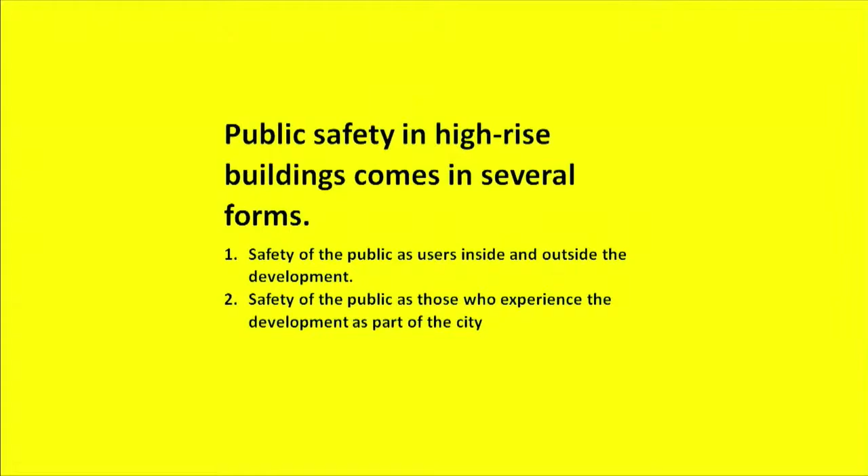That's essentially the main component of public safety that an architect or an engineer of a project would have to be responsible for. But at the same time, we have also the safety of the public as those who experience the development as part of a city.

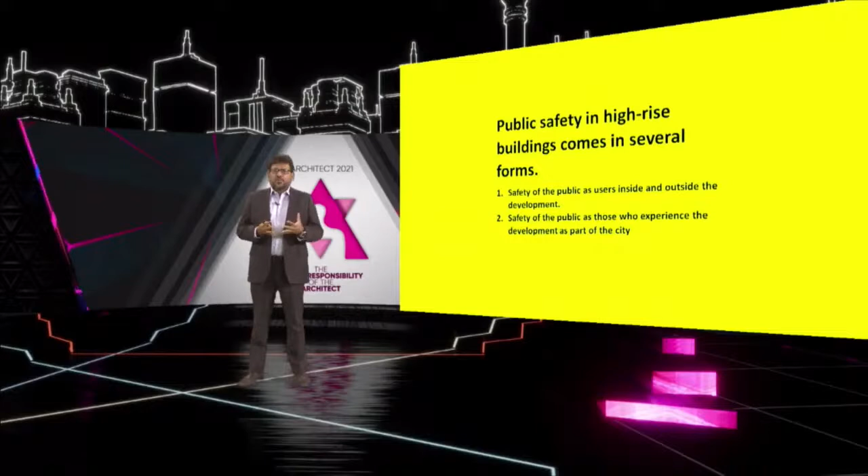Going into the safety of public as users, this comes in many forms. It comes as structural safety of a building, fire safety, passive and active forms, vertical transportation and safety from falls, safety of MEP systems, safety during construction, and these are essentially very well documented, coded, regulated, legalized. Architects, engineers, all the construction professionals are legally bound to follow these codes and regulations.

At the same time, we also have the safety of the public as those who experience a development, a building or a collection of buildings, a project, as part of a city.

We talk about responsibility to the larger built environment, effects of the microclimate, things like urban heat island, wind, sunlight patterns, ventilation, how those things get affected by the developments, high-rise buildings especially, then economic well-being of the citizenry, and how high-rise buildings or dense built architecture can affect these things within a city development.

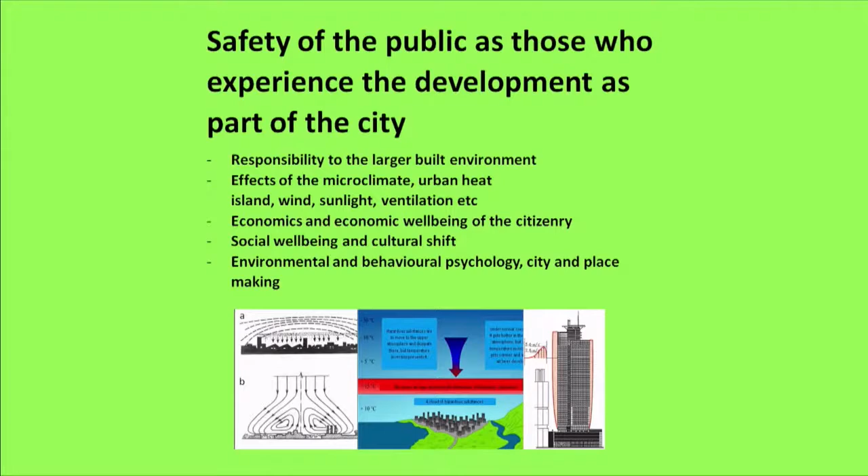We also talk about social well-being of a city or of its city dwellers, and the cultural shift that large mega developments would bring to a city or a country.

We also talk about environmental behavior, psychology of the citizenry, about placemaking, about city being a space for the public as well as for the buildings or the owners or the occupants of those buildings.

So safety of the public within the city becomes essentially a part of the responsibility of the architect who designs this city, mainly in the form of high-rise buildings and high-dense developments.

So high-rise buildings often are very prominent, celebrated static citizens of a city. Its owners, designers, constructors, governments, regulators, sometimes even the city itself celebrates these high-rise buildings as very important static citizens within the city.

So from banknotes to stamps to our social media to branding of a city to everything, the high-rise buildings always stand out.

With the celebrity status that we see high-rise buildings taking on within a city space, there is also a larger than life personality for them. Just like we expect from any celebrity in sports, drama, theater or movies, a city's larger than life static citizens, the high-rise buildings, also have this huge personality, and they become essentially imposing urban citizens.

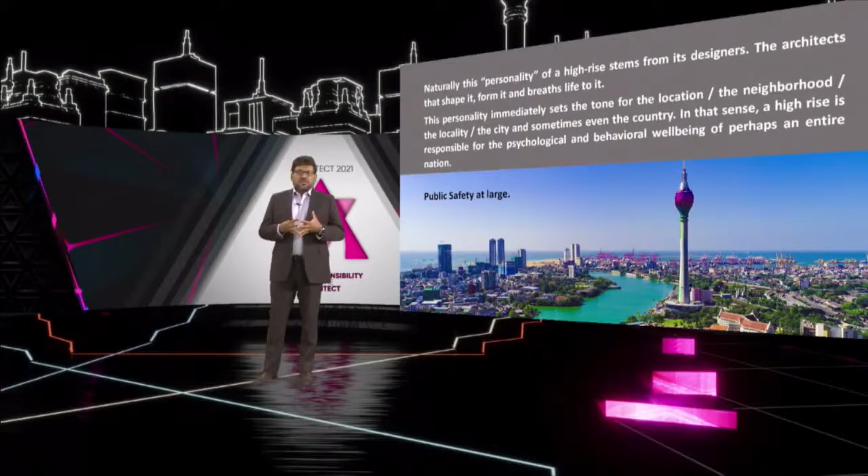So essentially, because of these key components, the design of a high-rise building could affect not just the safety or the well-being of the people who actually use it, but it also essentially relates to the psychological well-being or the overall health of a city as a whole.

This larger than life, intangible, qualitative form of public safety is not very well documented. We know there are codes for fire regulations, codes for density of a building, or codes for structural safety, but not necessarily about how a building relates itself or how it communicates its presence to the larger city.

In certain instances, urban design regulations or development control guidelines could address this to an extent, but by and large, especially in Sri Lanka, this responsibility lies with the architect, and the public trusts the architect to make sure these buildings or his creations have design features that will ensure the safety and well-being of the public.

So this is where making the right custard for your jelly comes in. As architects, we are very good at making jelly. Jelly can be really tasty, but it's the custard that pours around it, all around it, that will essentially make it delicious.

A city can't just be a collection of buildings, as we all know. The spaces around the buildings and how the buildings relate to the public spaces becomes absolutely important, just like the custard is important to enjoying a good bowl of jelly.

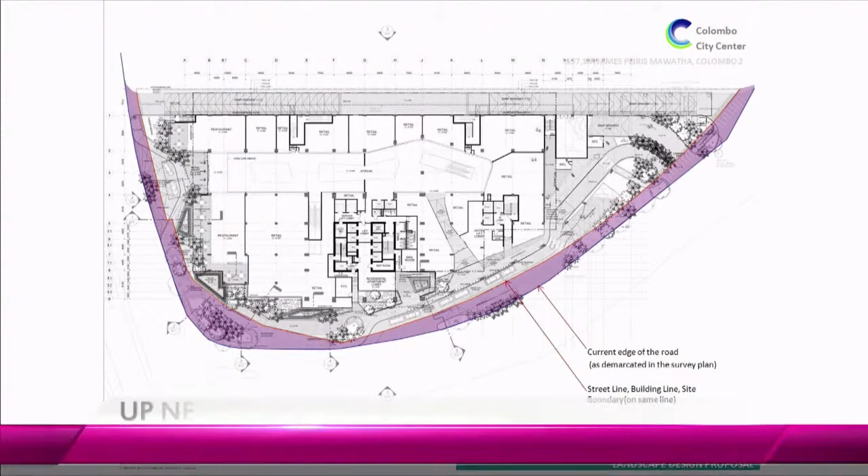Right from the outset of the design in 2013, us together with our international collaborators felt that the way this 48-story high-rise building connects to the public space is something we need to consider in the design. Essentially, this meant going beyond our developmental boundaries to see how we can merge the city's public space into the so-called private spaces of the building, ensuring the city responds positively to this 48-story, almost 1.2 million square foot development while recognizing its private boundaries.

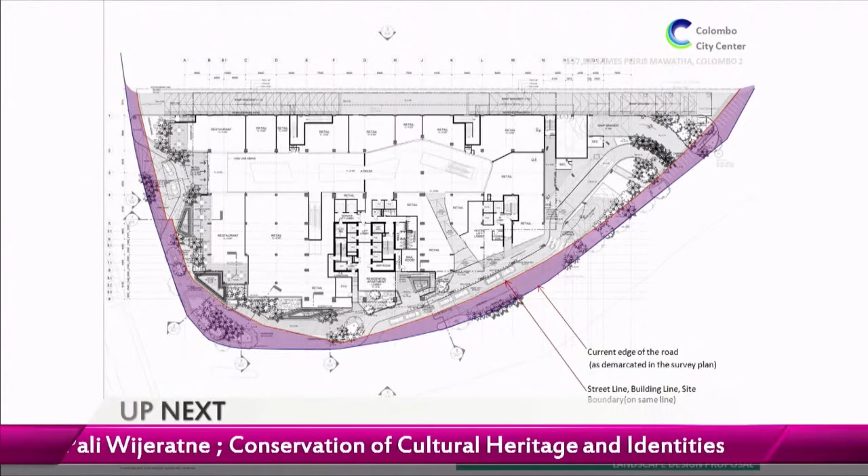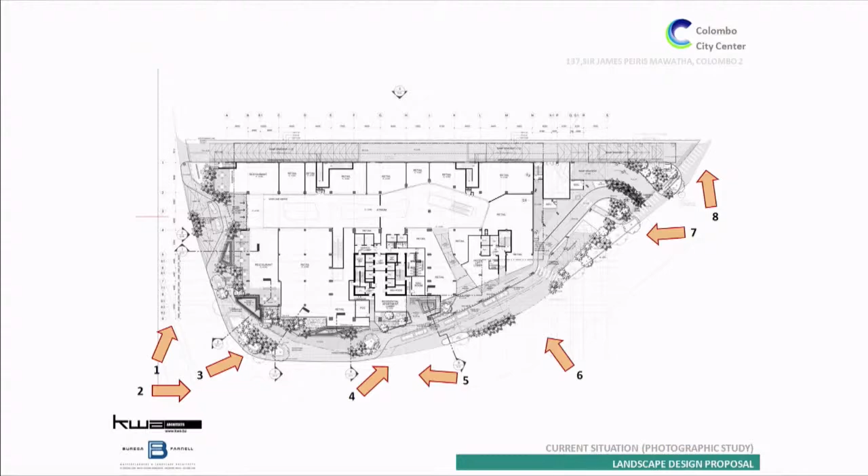So we looked at the street space down Muttiah Road as well as James Peiris Mawatha, which are the two main roads that the development is facing, and tried to understand what the existing scenario is and how this relationship from the building to the public space can be enhanced.

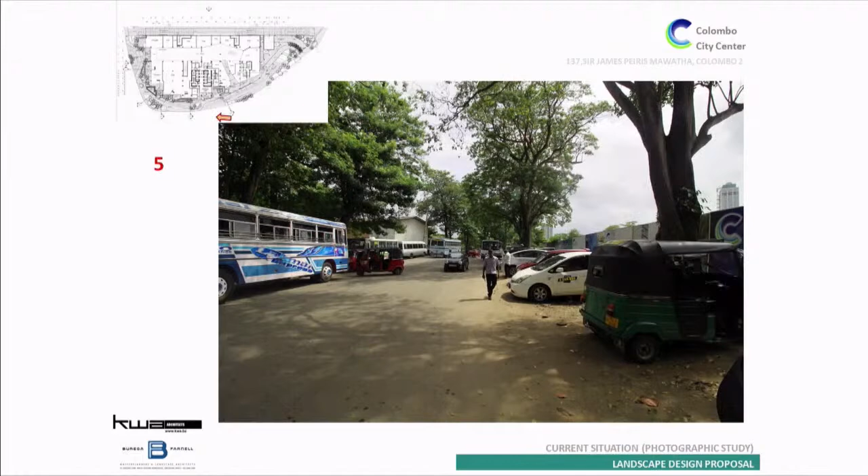So a few pictures of the site just as the land was acquired. Essentially, there was no public promenade as such, there were no public walkways. It's basically roadside parking, taken over for roadside parking. Absolutely no pavement present. People are walking down the tarmac to get from one place to the other. And there's a lot of stray garbage and haphazard vehicle parking happening down there.

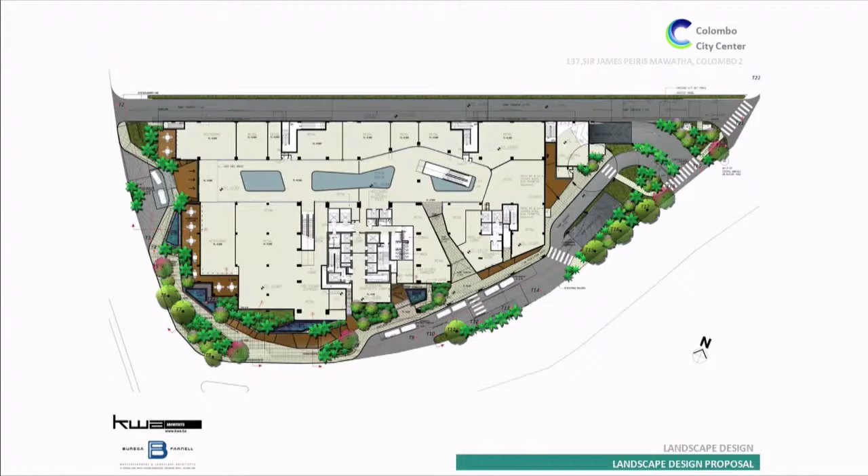So the CCC design attempted to ensure that the public entrances into the building were merged into the public space outside. It was seen as another small micro public garden kind of walkway, so that the pedestrian walkway can meander through bits of garden spaces, bits of street furniture, water features, and essentially almost subliminally welcome you into the public spaces.

Together with the international landscape designers, the entire streetscape was designed. Then it was presented to the Urban Development Authority as well as Colombo Municipal Council, who legally own the pavement spaces or public spaces along the roads in Colombo, and the presentation explained how this 48-story high-rise building was trying to merge into the public space.

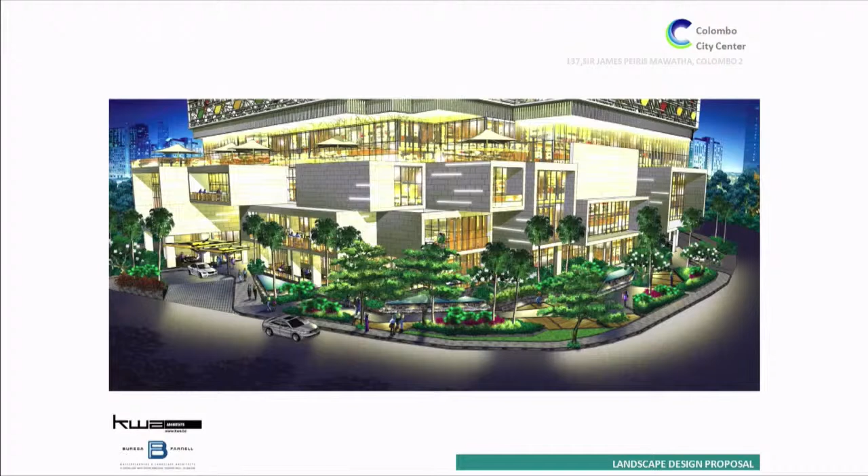I have to say all government agencies looked very positively at this, and they welcomed this approach from a private developer. The expense of designing all these public spaces as well as the expense of constructing them were borne by the developer, so there was essentially no cost to the taxpayers in enhancing this urban space.

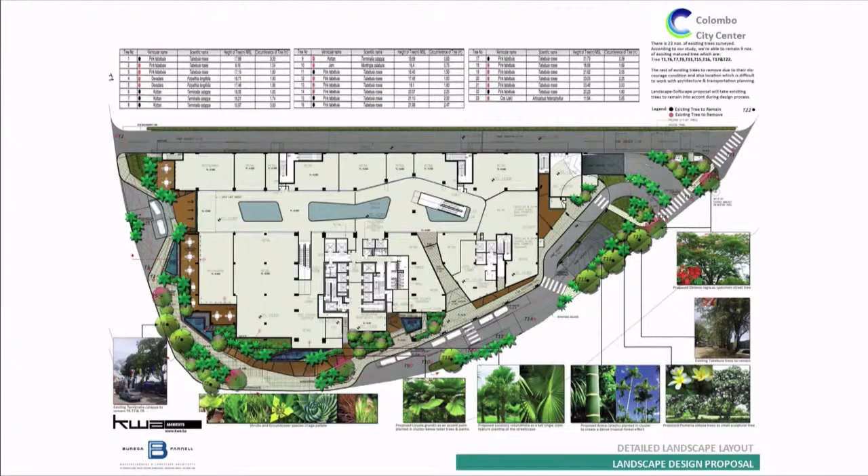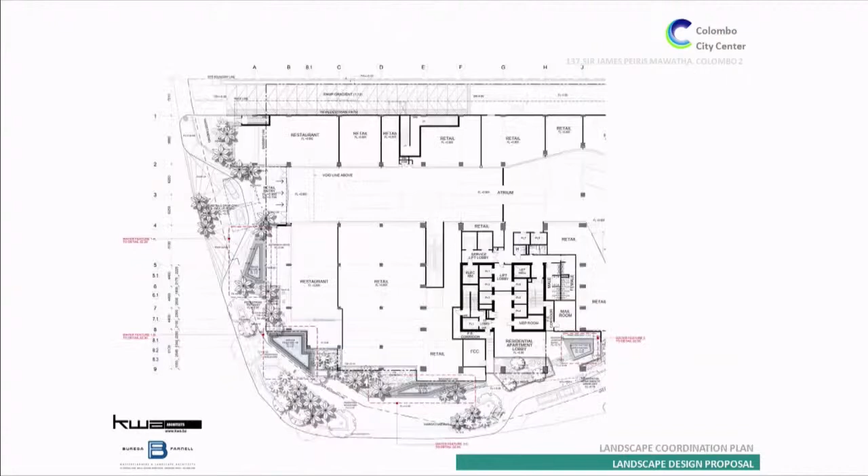The entire landscape, including the types of trees, plants, shrubs and bushes which were going to be planted, were all identified and presented. Variety of colors, textures and finishes were all identified earlier on as well. From that, a detailed design was done to show how the landscapes could merge into the public walkway.

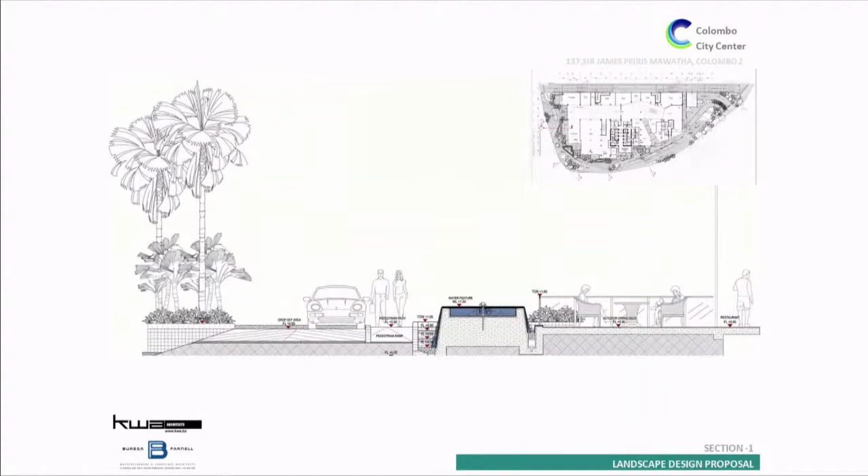A few water features were added, along with tall trees, shrubs and bushes, and flowering plants. Essentially, towards the completion of the shopping mall, where the Colombo City Centre opened to the public, the streetscape also came alive.

Built-in furniture for the use of the public, wide, comfortable walkways, variety of finishes and textures to keep the interest in the street space continued. Water features along the edges, all these help to merge the private space into the public space in a seamless manner, welcoming the people in Colombo into the building.

Subsequently, around high-rise developments in other parts of Colombo as well, we see this trend continuing, sometimes not always funded by the developers, but also government agencies taking the initiative in creating these very exciting and interesting public spaces along the waterfronts, along little urban pockets where the definition of public and private space is now slowly dissolving.

So the idea is that as we do this, as the number of high-rise buildings within Colombo increases, this elimination of the definition of private space to public space will enhance the overall health of the city in terms of the spatial psychology that the urban dweller experiences.

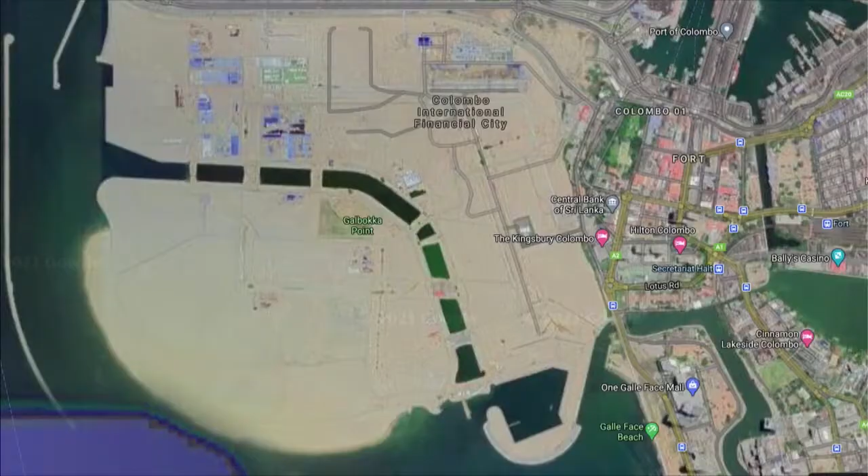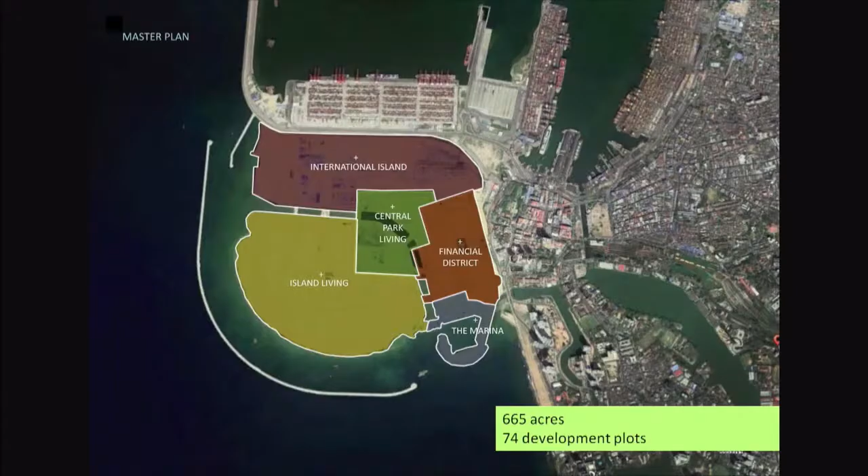Now what's interesting about Port City is that it's already reclaimed. The land has already been reclaimed. There are something like 74 plots of land which are to be given to private developers for development. But what's also interesting is that it has been identified to go into different districts within this 665 acre city development, and the land reclamation work is now complete, as the developer has also confirmed to the public.

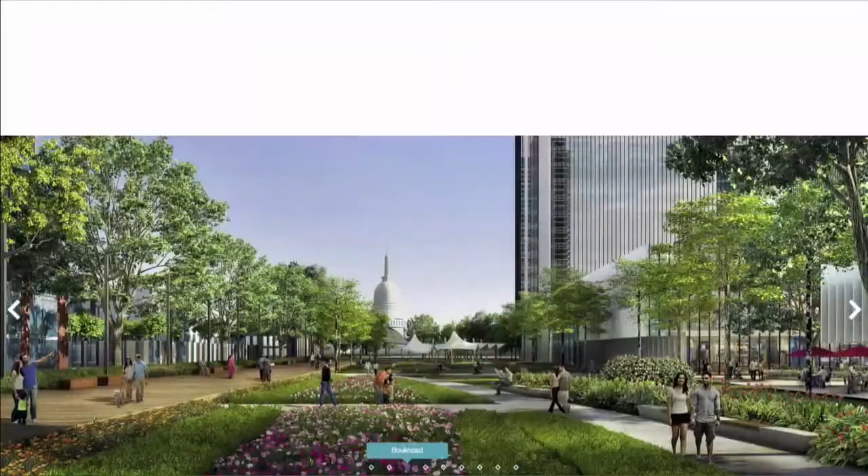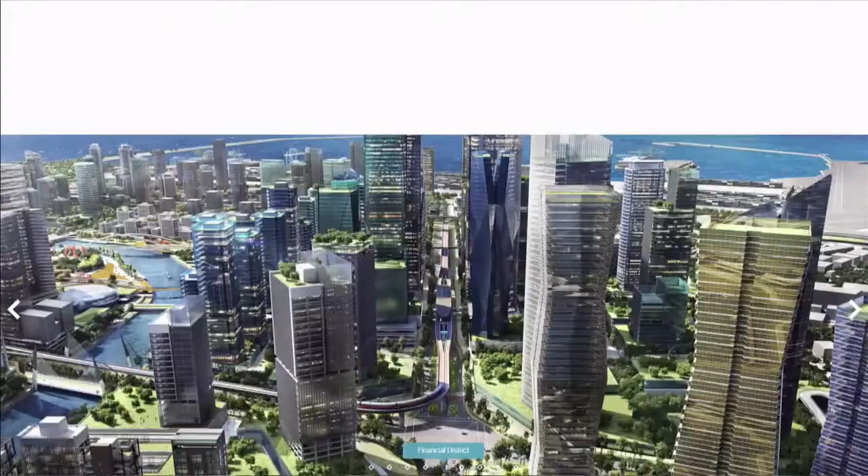So the marina spaces, as seen in the visuals that they have issued, there are large areas of public parklands, public promenades, pedestrian bridges, public art and sculptures, connections through proposed public transport systems, and of course, with the reclaimed oceanfront land, there is a very large public beach.

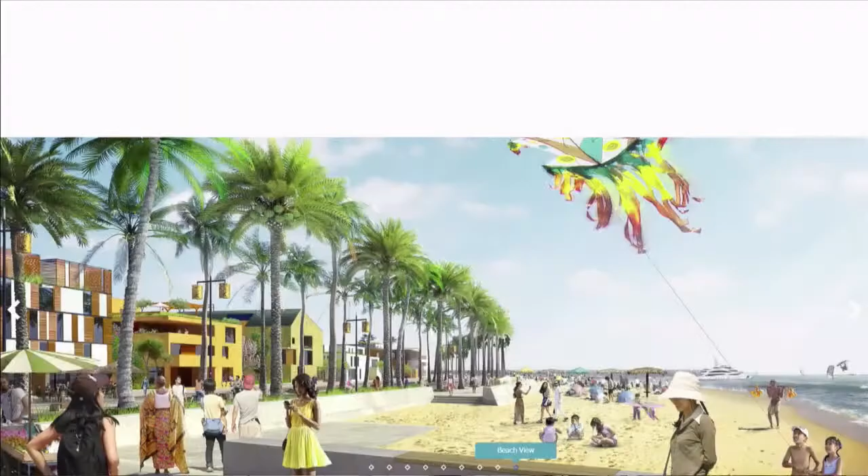So what's so special about Port City? I mean, as a political entity, it's always controversial, but I'm touching on the architectural and design features of that. So what's special about Port City is that...

A few minutes ago I said that the regulations that govern the overall public health or public well-being of a city in relation to high-rise developments are not very strictly controlled, and that to a very large extent the responsibility is with the architects. But that's about to change over here.

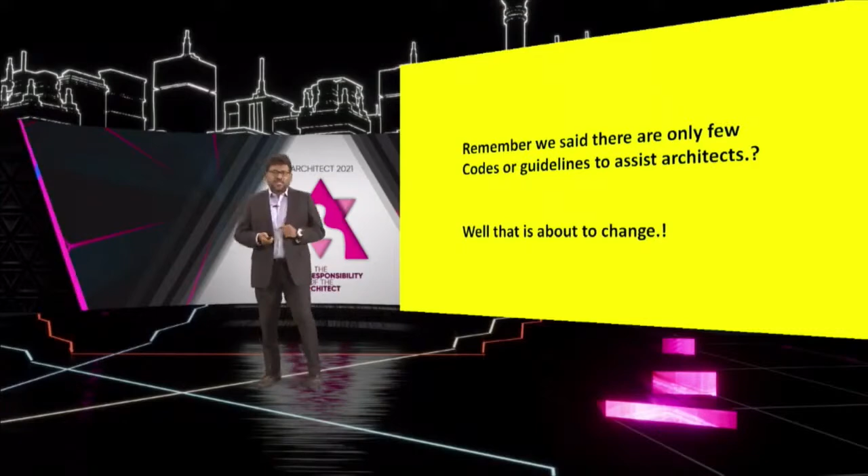So Port City, although it's part of the City of Colombo, has a very detailed development control guideline. It has a very specific focus on green areas in terms of landscaping spaces within private land plots, detailed control over vehicular entrances and exits, highly detailed information on public promenades, how the high rises that will be coming up can relate to the public space outside. In certain instances, even the height of the public promenades that the private developer has to maintain are all very explicitly explained and controlled.

So with this, Port City has the potential to become a very livable urban space.

But like we said, Colombo proper city regulation is still not detailed to that level. Obviously, Colombo being 37 square kilometers of land, it's much larger than Port City, and there are so many different social and economic intricacies within the city of Colombo. It might not be able to control development to that level.

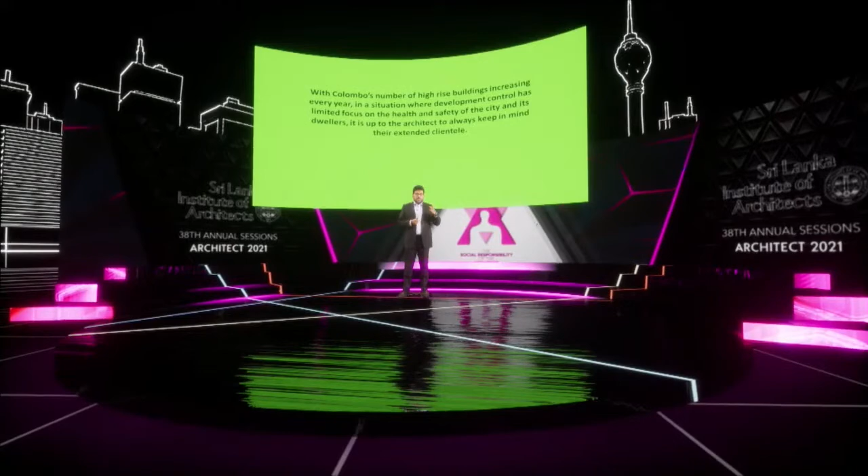So essentially, even for the next 20 years, developing alongside Port City, Colombo proper will look towards its architects to make sure that the city itself stays as a safe public space for the people of the city.

So with Colombo's number of high-rise buildings increasing every year, in a situation where the development control has limited focus on the health and safety of the city and its dwellers, it's up to the architects to always keep in mind that their extended clientele is essentially the people of the city. So health and safety, or the safety aspects of a high-rise building, goes beyond the architect's immediate responsibility to his or her client and the immediate users, extending overall into the city space.

And I hope going forward, all of us architects will keep this in mind. Thank you very much.